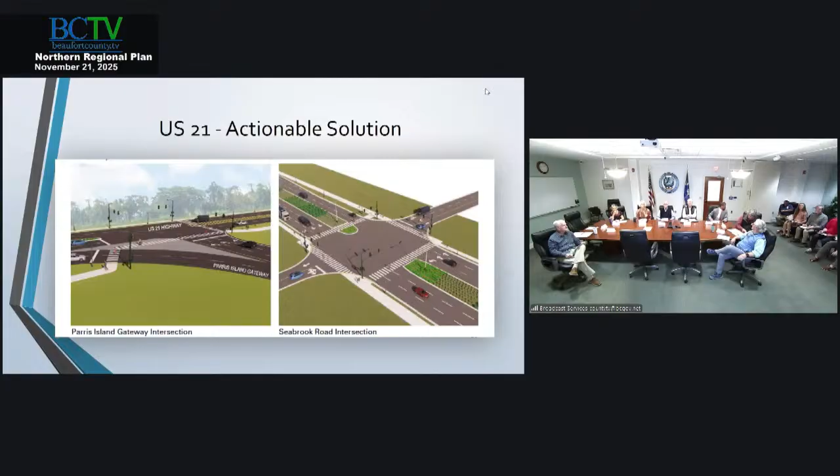The first study we're going to look at is the Joe Frazier study. So if you're not familiar with Joe Frazier, it is a roadway that sits in between Laurel Bay and Broad River. That's fine, right there, okay.

There are a few things that are of concern for us for this particular corridor, but we just pulled out the fact that there is a significant amount of planned and improved developments happening around this corridor. So that's a part of the reason why we studied it. These developments range from infrastructure enhancements to commercial and residential expansions, and they hold the potential to shape the future travel patterns within this corridor.

Question about the Burlington PUD that Rob may know. Is that expired yet? No, there's an option for county council to reevaluate it, but until they do that, it's still PUD. So it's like one of those ones that's not going to expire unless action is taken. Unless actions. How big, that's a pretty large chunk of land. Yeah, I don't know the exact numbers, but in the neighborhood of about 1,000 acres and 1,000 units. That seems grand too. Yeah. I hadn't thought about that in a long time.

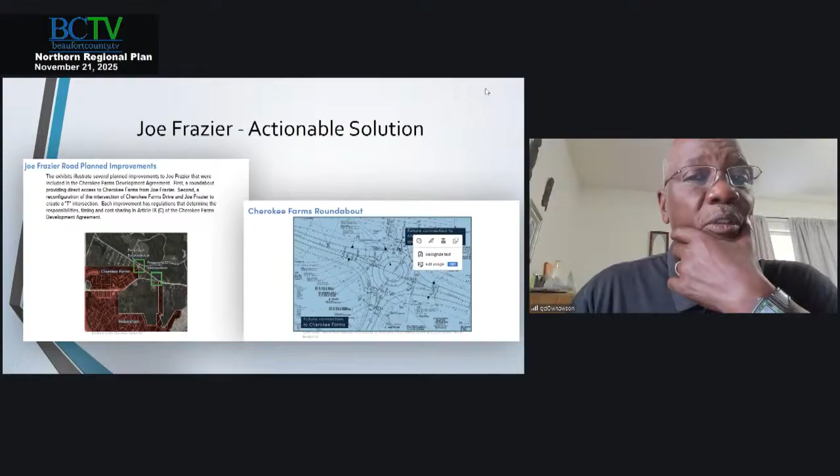The residents living there, particularly on that stretch from the roundabout to the next curve by Laurel Bay Baptist Church, are complaining that it's hard for them to get out because traffic is speeding at such a high rate. Can we look at that and consider slowing the traffic down in that area?

Yes, we can, and that was actually part of our study. We looked at speed and crashes along this corridor. To answer your question, yes, we will definitely zone in on speeding. We have those capabilities in the county, in the Office of Engineering as well, so we can do studies, go out and do field tests, et cetera, to confirm and validate what the citizens are saying. All right, thank you.

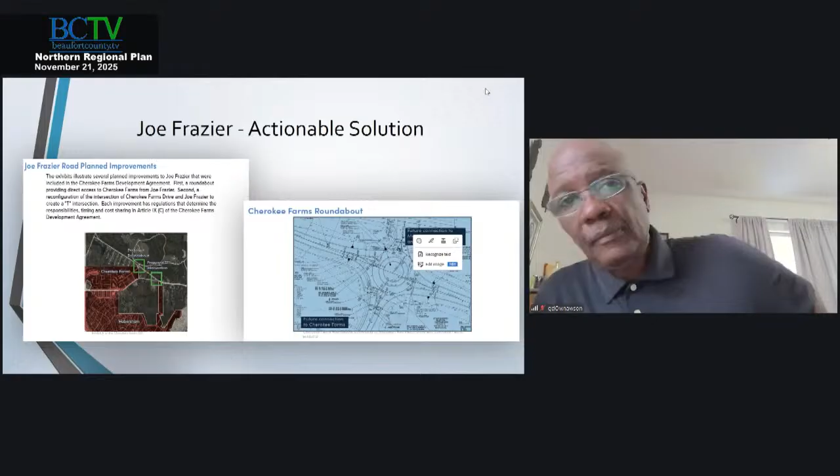So this is a few of the actionable solutions that you'll see in the actual study. Cherokee Farms is a development that has been approved and will be coming online soon.

In the first image you see two green boxes, and those are intersections that we feel if we improve, it would improve the mobility and safety along the corridor. So instead of all the traffic using that current access to Habersham, we are looking at creating a roundabout that will give direct access to Cherokee Farms.

This was part of their PUD, and we are going to implement that as part of this corridor plan. This is just one of many things we plan to do in the corridor, but of course we couldn't talk about every single thing today. We just pulled out a few things for us all to chew on. So safer intersection design reduces the probability of severe crashes.

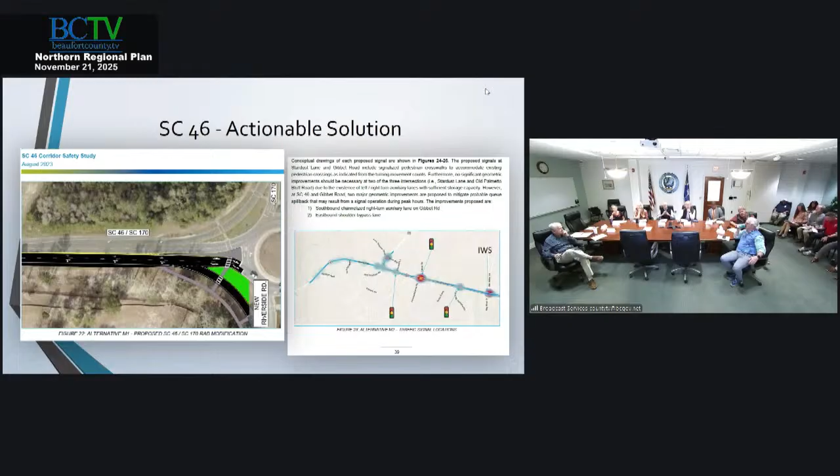So the next study that we're working on is the US 21 study. This is a very important study because this is the gateway into the county.

This isn't completely 21, then? No, the limits were from US 17 to Keans Neck Road. The Parris Island Gateway was redesignated 21 for truck traffic because of Woods Bridge, so it's not really completely 21.

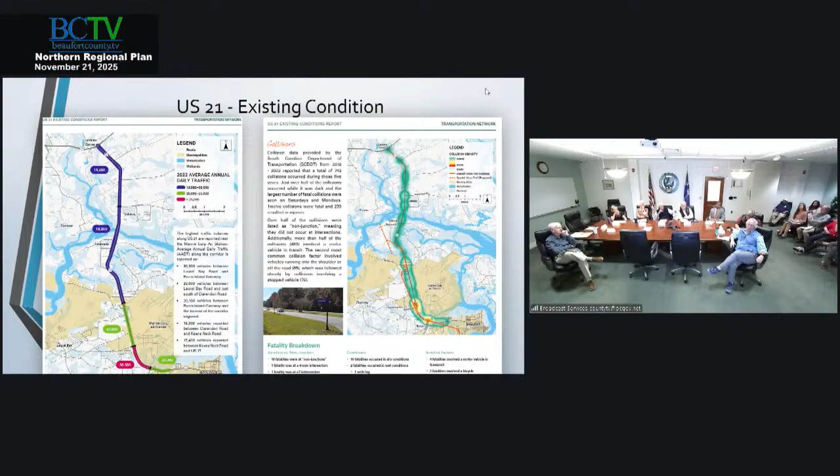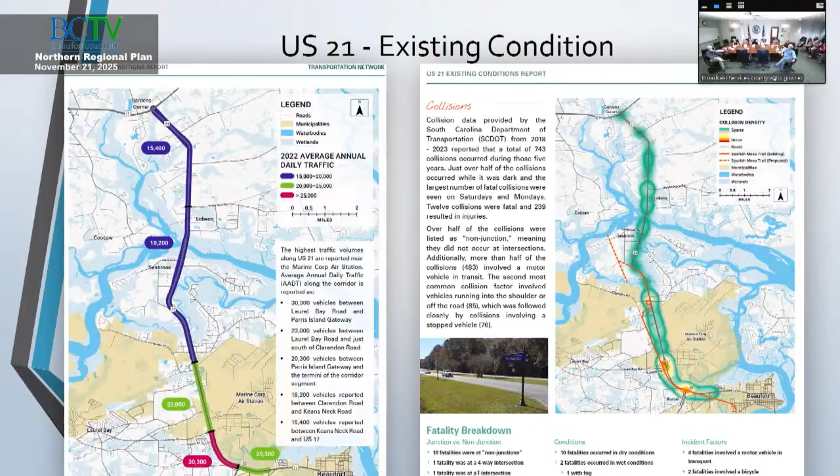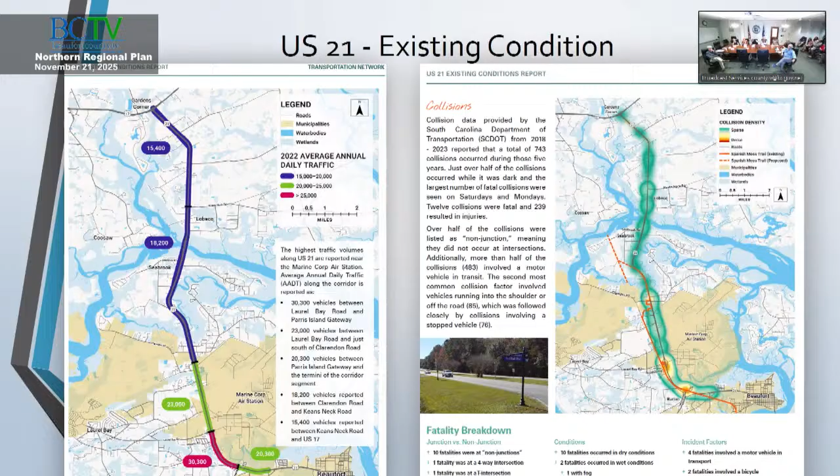The next slide talks about actionable solutions. Basically, because US 21 is the gateway into the corridor, our analysis showed us that increasing mobility would be very important along the corridor, because it's a gateway into the county. But in order to increase mobility, we have to design safer intersections along the corridor.

Implementing geometric improvements at certain locations without widening provides network level relief. The first intersection is US 21 at Parris Island Gateway, we all know about that intersection. What we are contemplating with this concept: if you want to go towards the air station and you're on Parris Island Gateway at the light, we're contemplating a double left there, and then one right if you want to go the opposite direction.

As you can see on 21, there's no left turns on the Parris Island Gateway. We're contemplating whether or not it would be best to just keep traffic moving along there and then have left turns maybe at Burton Hill, or create another place where we can have left turns a little further down the road, like a whole new alternative.

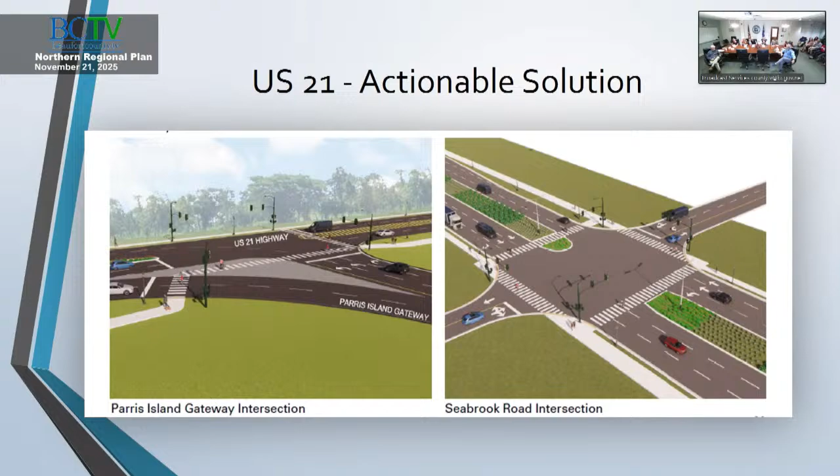So the next studies we're going into are not corridor studies, they're access management studies. It's simple and straight to the point - we're looking at how to best address access management issues along the corridor.

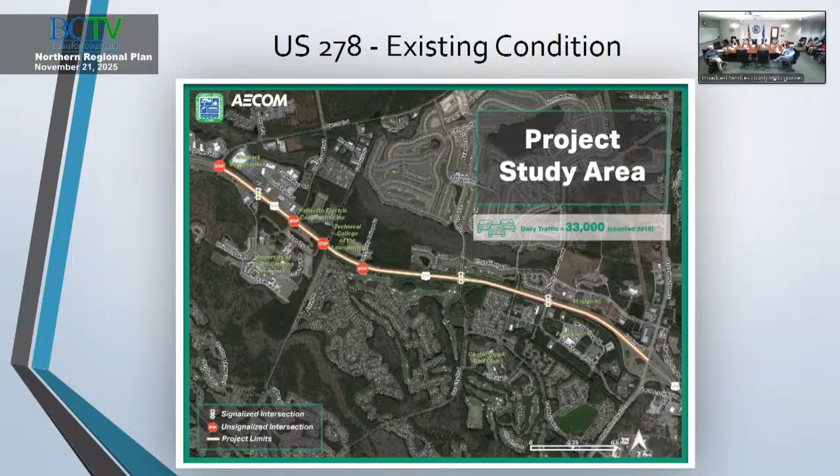So the next slide shows an actionable solution. As you can see, there's 3 lanes instead of 2. So this solution shows that we're going to widen the road from 2 lanes to 3 lanes, and widening provides a lot of benefits through this particular section of 278.

Widening, plus the lowering of speeds, plus adaptive signal implementation, plus geometric improvements at intersections, should cut delay at the intersections and reduce the number and severity of crashes along the corridor.

This is Sun City, so this is an intersection where you would have a widening through there - there will be 3 lanes. But it's called a bow tie intersection, because you see the red striped out portions to the top left and bottom right.

Those are merging lanes that merge today, but in this particular improvement, our analysis showed that we shouldn't have the merging lane, because those merging lanes affect the flow of traffic. So in this analysis, we feel that if we take those out and make those geometric improvements, the flow of traffic will be better and it will cut the delay along the corridor, because cars coming through don't necessarily have to slow down right after they pass the light to see if somebody is coming in.

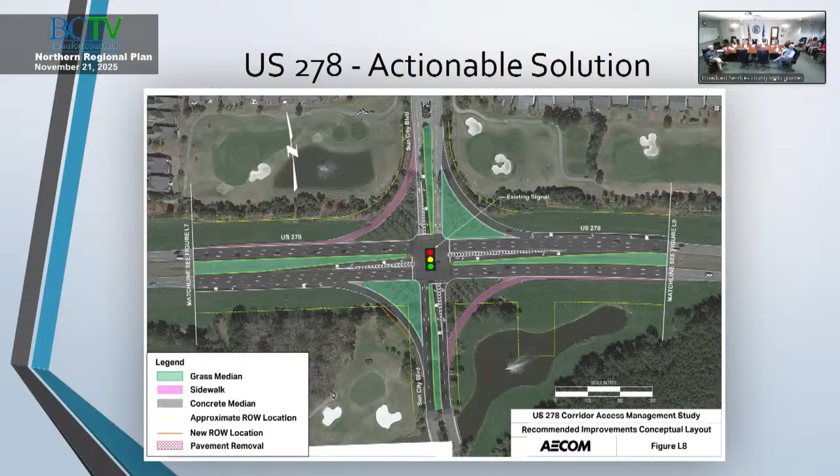The next slide shows types of intersections we think we could use along this corridor. The one to the right is the bow tie we were just talking about. It involves signal adjustments and protected left turns, eliminating left-turn related crashes, and adaptive signal control.

We also have what's called a continuous green T. That's something that was contemplated back in 2021 when we did this study, not for Argent, but for the community college drive. We don't necessarily know if it's going to remain that way, but when our traffic analysis came back, it said this particular intersection design works well at community college drive. So these are the types of designs we're looking at for this segment of the corridor.

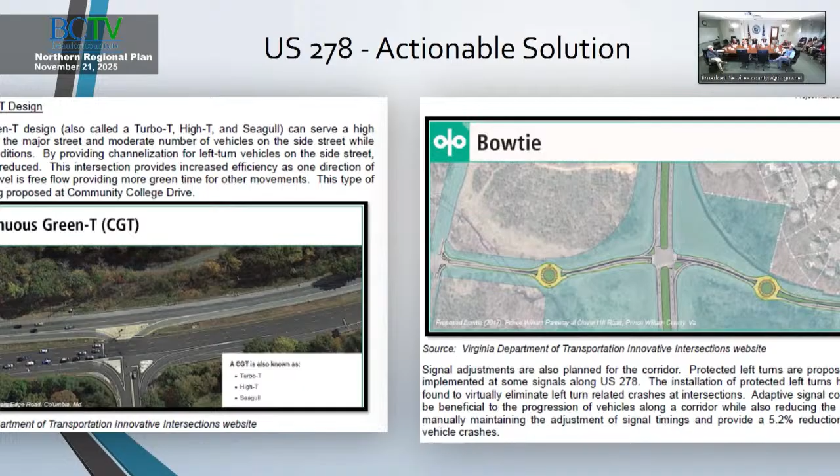The next slide shows an actionable solution. As you can see, there's Bluffton Parkway at Simmonsville Road, and there's a red circle on that left slide. That red circle is a full access intersection, but there's no light there. So when we say full, that means the side streets can come out, make a left, make a right, and making a left turn in is permitted. As you can see, we have right-in, right-outs being planned for certain side streets.

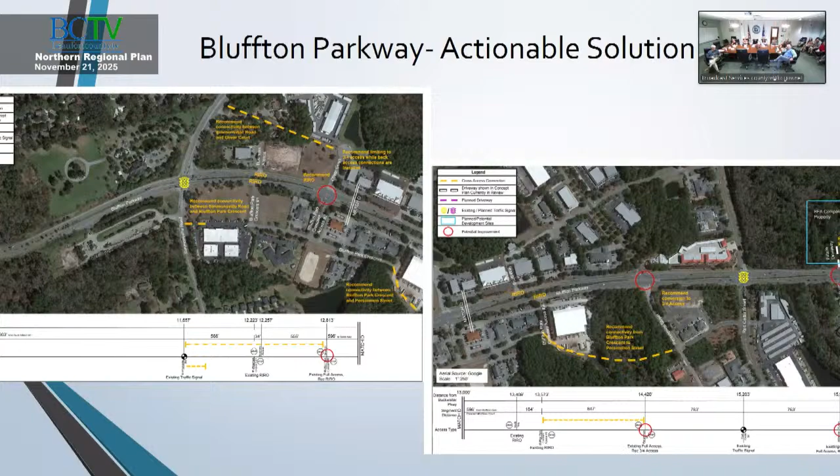So those are all the access management plans and corridor studies that have been completed to date. Now these are the ones we have underway. Our objective was to identify existing conditions and next steps, and the lens we were looking through was how to best address capacity as well.

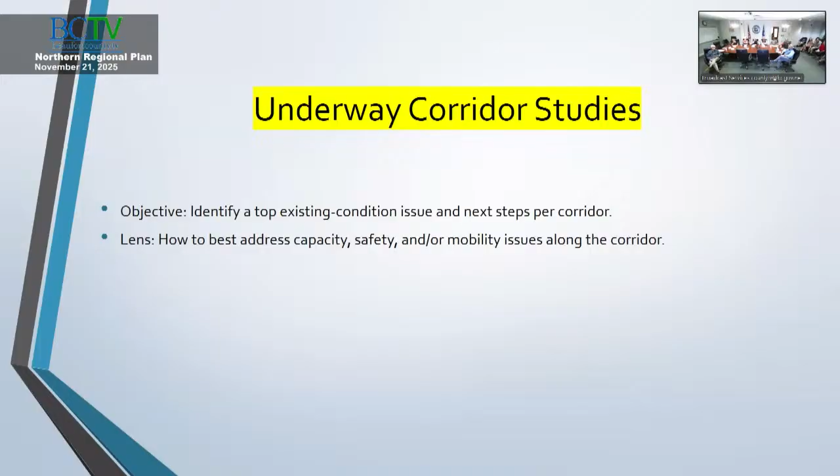The first one that's underway that I am extremely excited about is what we're calling our ITS master plan, our Intelligent Transportation System Master Plan. It's sort of like the brains of the equipment we're going to use to talk to one another across boundaries, and also with respect to knowing our assets, so we can collaborate in the future. Regionally speaking, we can respond to evacuations better, respond to emergency management events better, respond to the average crash on a bridge better, or a crash at a significant intersection like 278 and 178, or 278 and 170. With the ITS master plan in place, we feel we'll be able to respond to incidents in a much quicker, more efficient, more proactive fashion.

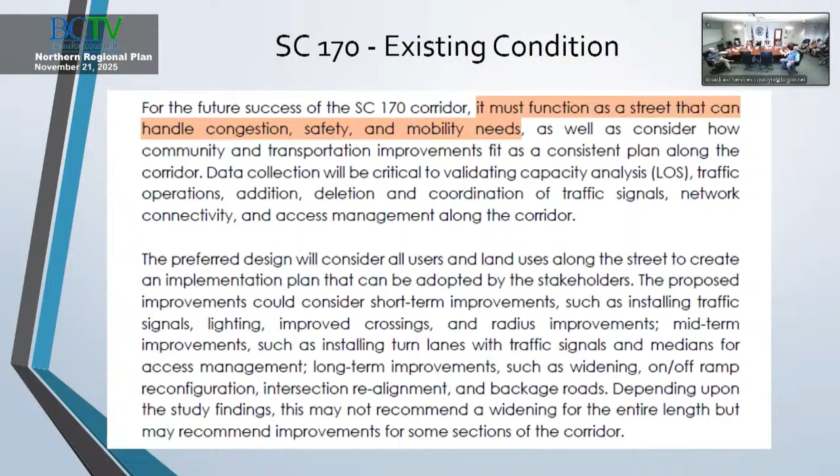That's where we're at with that one. We've had our kickoff, we've done our existing analysis, we've had one stakeholder review meeting, and we're going to have another stakeholder review meeting coming up in December. We're working on alternative evaluations and concepts for this one as well.

Where will that meeting be, Norman? It's going to be at Beaufort Jasper, right at Snake. Oh okay, they have a conference room there. Yeah, it's going to be on the 12th. We haven't sent out the meeting notice yet.

That's where it starts back. That's where Waze tells me to turn now. So let me go down to 462 and then you get into another problem. Yeah, now it just takes you to 95. That's right, don't even go that way. Get on 95, come in on exit 8.

So that's the presentation in a nutshell. What they are doing, I saw the public notice at Snake Road. Brian, our director, had our lead traffic engineer go out there, along with consultants, and they were optimizing the signal, because they saw there was some lag time at certain legs, so people were just sitting when they shouldn't be.